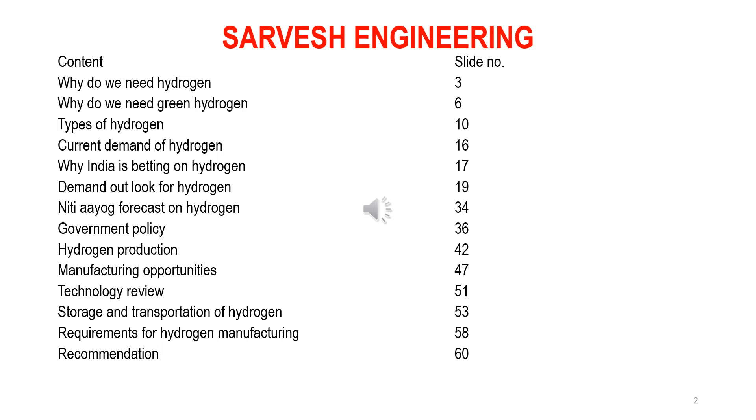As we all know, hydrogen is number one element in the periodic table. Although hydrogen is available in abundance, it is not available in free form. It is always combined with some other elements and it needs to be extracted for its use. Hydrogen requires very low amount of air or oxygen to burn. When hydrogen is burned, it produces water vapors, means there is no carbon or greenhouse gas generation during the process.

Hydrogen is not a direct substitute for coal, oil and natural gas, but it can help to decarbonize. Hydrogen could account for 12% of global energy by 2050. Decarbonizing the planet is one of the main objectives which world has taken over. The developed countries have agreed for decarbonization by 2050, whereas India has pledged for it by 2070.

Decarbonizing the production of hydrogen gives rise to green hydrogen. Means in green hydrogen there is no carbon element involved, either in manufacturing or in usage. Green hydrogen could be a huge value addition opportunity for India as it pivots towards renewables and from imported fossil fuels, which currently meet most of the oil and gas demand in India.

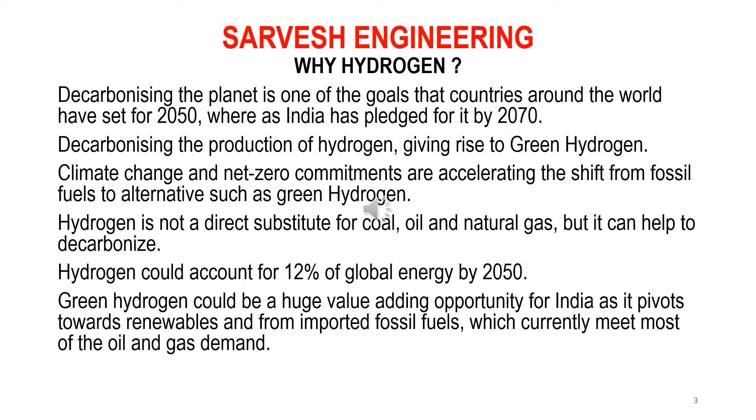The conventional process of making hydrogen uses fossil fuel. A novel green method of generating hydrogen could reduce global warming and greenhouse gas generation. Green hydrogen is produced by using renewable energy to split water into hydrogen and oxygen. Hydrogen is a key input material in fertilizer and refineries, so green hydrogen would help these industries cut aggregate emission.

Till now, we have been focusing on renewable energy sources for clean energy, but for industry and transport sector transition to net zero emission, a clean fuel is required, and that clean fuel is green hydrogen. When we use renewable energy for production of hydrogen, there is no carbon or greenhouse gas generation. When this hydrogen is used as a fuel, there is no carbon or greenhouse gas generation as it produces only water vapors, and it is the complete green fuel. This green fuel can help minimize the carbon generation and bring down the global warming to the desired level of 1.5 degree Celsius.

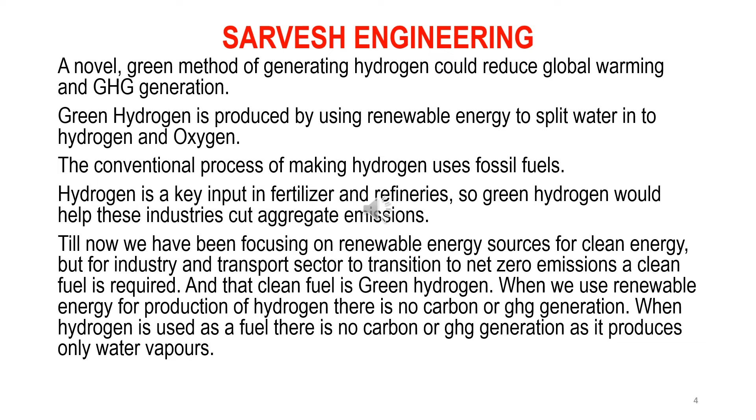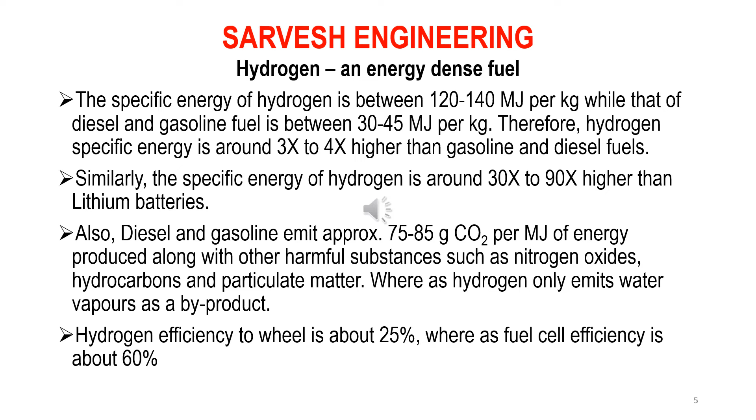When we burn petrol or diesel, gasoline emits about 75 to 85 grams of CO2 along with other harmful substances such as nitrogen oxide, hydrocarbons, and particulate matter, whereas hydrogen only emits water vapor as a byproduct. Hydrogen can be blended with natural gas, CNG, LPG, etc., or other fossil fuel in small portion. Hydrogen has the highest energy content by weight of any chemical fuel. It is 3 to 4 times higher than gasoline.

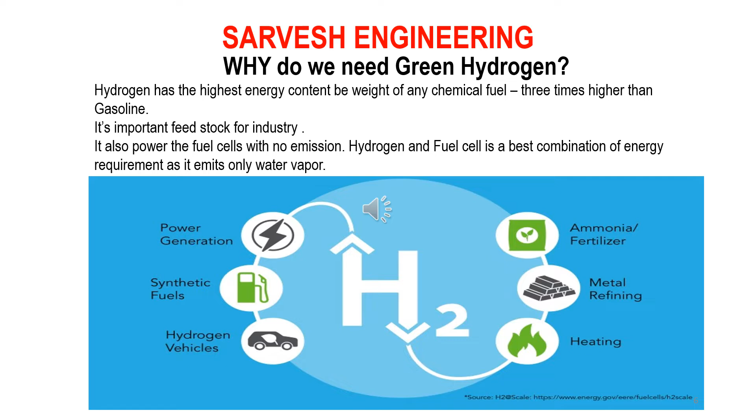Hydrogen is one of the important feedstocks for industry as it is widely used for fertilizer and refinery. Hydrogen also powers the fuel cell with no emission. Hydrogen and fuel cell is the best combination for energy requirement as it emits only water vapor. Hydrogen is one of the best energy carriers. Hydrogen is used for power generation. Hydrogen is used as synthetic fuel. Hydrogen is used for fuel in hydrogen vehicles. Hydrogen is used for heating. Hydrogen is used for metal refining, and hydrogen is used for manufacturing ammonia and fertilizer. This is a wide use of hydrogen in industry.

Why is the hydrogen economy important for India? One of the main reasons: we are importing energy worth $160 billion, and the import bills for energy can be minimized with hydrogen in place. We have also committed to decarbonization by using more and more renewable energy. Currently, we have installation of 92 gigawatt of renewable energy, whereas by 2030 we want to increase this generation to 450 gigawatt. This is possible with green hydrogen generation.

We are the third largest carbon emitter after US and China. We are emitting about 3.6 gigaton equivalent of CO2 in the atmosphere. And in order to become a clean energy leader, we need to minimize or zero down this carbon emission, and this is possible with green hydrogen.

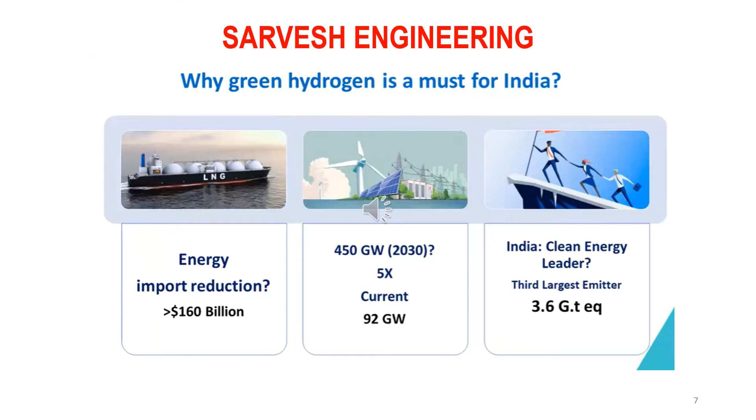The energy import bills of $160 billion, which are growing every year, consist of crude oil $112 billion, natural gas and LNG approximately $10 billion, coal $23.6 billion, petroleum products $16.2 billion, and ammonia about $775 million.

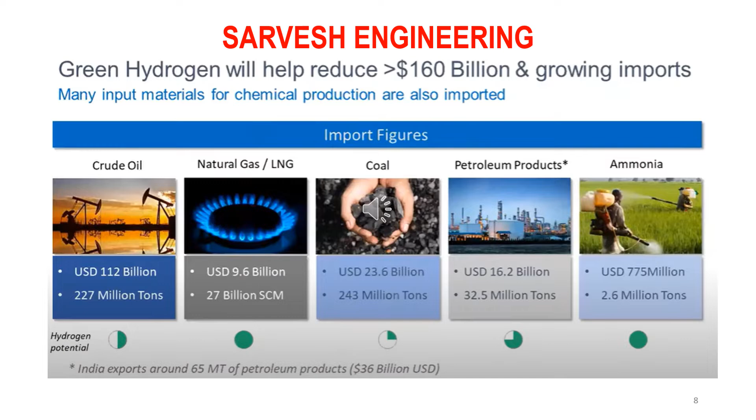This import bill can be minimized with green hydrogen if it is in place, and that's one of the main reasons why the government is focusing on green hydrogen and promoting green hydrogen manufacturing in India as per the recent government policies announced. Green hydrogen manufacturing is going to help us in two goals. One of them is energy security and the second is decarbonization.

Even if we do the complete decarbonization of our energy generation, that is, if we replace 100% of power generation by green energy, we are going to reduce only 18% of the carbon emission. The balance 82% of carbon emission is coming from other sources which need to be minimized. And for this decarbonization of 82%, we need to concentrate on green hydrogen usage in industry, the transport sector and other areas other than energy generation.

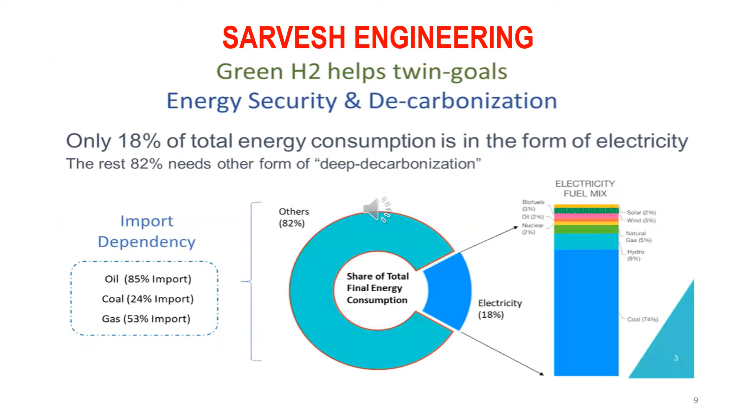Hydrogen is a colorless gas. Then why do we say green hydrogen, blue hydrogen, grey hydrogen? It is basically designated from the way it is manufactured. In grey hydrogen, we do steam methane reforming, and the energy used is non-renewable energy. So when we are manufacturing this, there is carbon emission into the atmosphere, and that's the reason it is called grey hydrogen. In blue hydrogen, steam methane reforming is done and the carbon generated is captured or stored. So this carbon is not released into the atmosphere, but there is carbon generation during the process, and that's the reason it is called blue hydrogen.

In turquoise hydrogen, methane undergoes pyrolysis and the carbon generated is stored. The energy is again non-renewable energy, so there is carbon generation during the process, and this is called turquoise hydrogen. Pink hydrogen is a type where water is electrolyzed with electricity received from nuclear power. In green hydrogen, water electrolysis is done again, but it is done with renewable energy and there is no carbon generation during the process. Since there is no carbon generation during the manufacturing of the hydrogen, it is called green hydrogen.

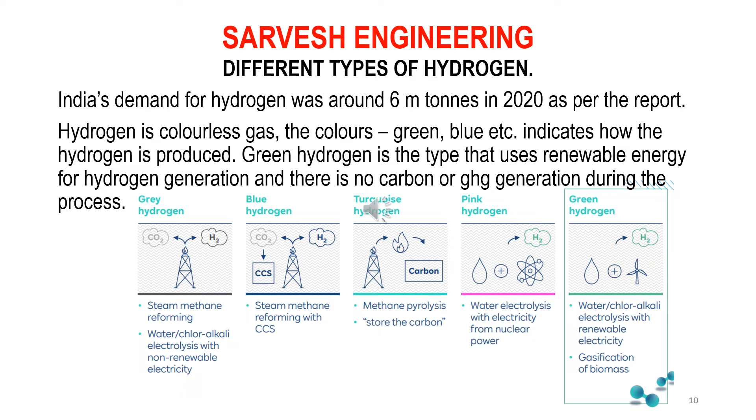And hereafter we will be talking more and more about green hydrogen because India aims to be a world leader in manufacturing and supply of green hydrogen. Green hydrogen is made by electrolysis of water, and the energy used for electrolysis is supplied by a renewable source. Since the water is split into hydrogen and oxygen, there is no carbon emission in the process and as such it is termed green hydrogen.

So in this green hydrogen process, we use energy from renewable sources. This energy is given to the electrolyzer. The electrolyzer does the electrolysis of the water. The hydrogen is distributed, stored and further used for end applications. During the end application, the exhaust is only water vapor and there is absolutely no carbon or greenhouse gas generation in the process, and that is the reason it is called green.

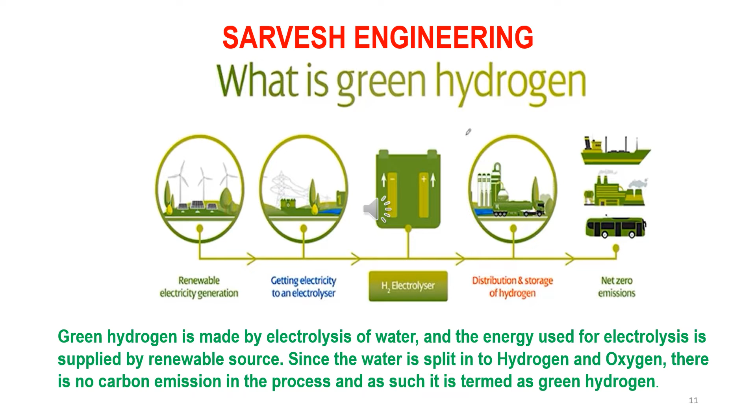This is a schematic of the electrolysis process. We have green energy as an input and water as an input. The green energy and water are supplied here to the electrolyzer. The electrolyzer converts this water into hydrogen and oxygen, and this is the basic process of electrolysis.

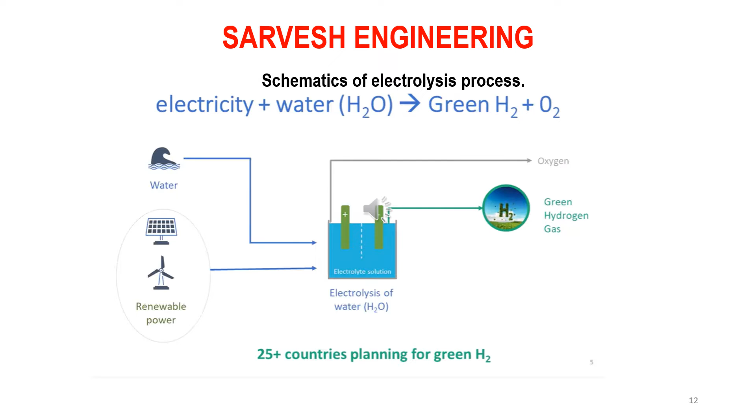India has the lowest solar energy price at 1.99 rupees per kilowatt-hour. And with this low energy price, India is targeting a green hydrogen price of $1.5 per kg by 2030. With this lowest price, the country is trying to be a global hydrogen supplier and take the lead.

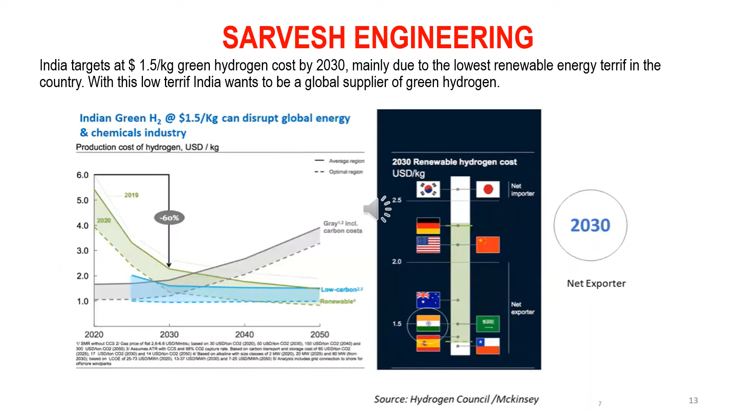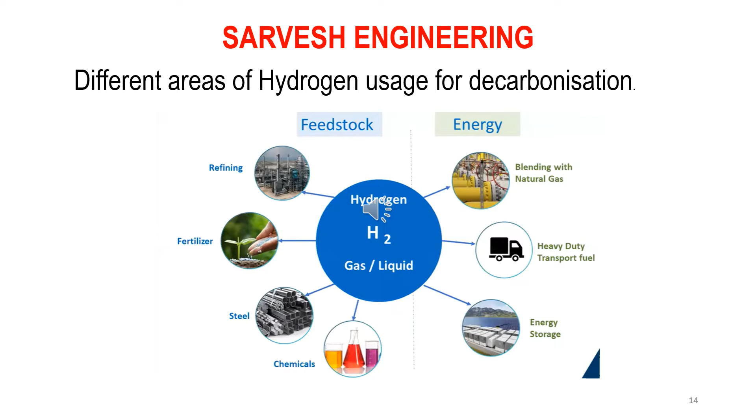Hydrogen can decarbonize different areas like energy by blending it with natural gas, heavy duty transport and fuel applications. Hydrogen can be used as energy storage also. Hydrogen is used as feedstock in chemicals, in steel manufacturing, for fertilizer and for refining. So hydrogen has a very wide application. Green hydrogen can reduce more than 30% of carbon emission in sectors other than energy. This 30% plus is contributed by chemicals, refining, cement, iron and steel industry, and heavy transport.

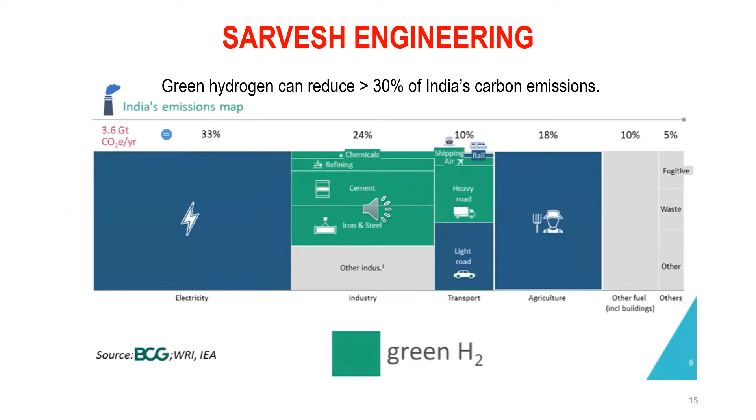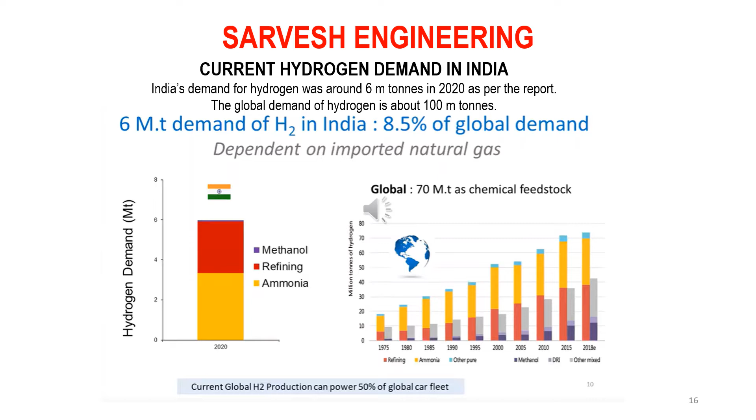Current hydrogen demand as of 2020 was 6 million tons, which is about 8.5% of the global demand. This 6 million tons is mainly used for refining and ammonia. The global demand for hydrogen was 70 million tons in 2020.

Why is India betting big on hydrogen? Mainly because of its energy security issues, emission targets, economic dependence and balance of trade, and energy subsidies. Fluctuation in oil and gas prices on a daily basis disturbs the supply and demand chain, which makes oil prices vary daily at fuel stations. We need to find an alternative to strengthen national energy security, and hydrogen is important for that.

India is the third largest global carbon dioxide emitter, accounting for about 7% of emissions. Our emission levels are below China and the United States of America. India has committed to reduce its emission level by 33 to 35% under the Paris Agreement by 2030, and by 2070 we have agreed to become a carbon neutral country.

India is the third largest crude oil importer, with import dependence of more than 80%. It also imports 53% of natural gas and 24% of coal requirements, which greatly affects our financial balance. India's oil import bill in 2019 and 2020 was approximately US dollar 111.9 billion and US dollar 101.4 billion respectively. India gives an overall energy subsidy of approximately US dollar 30 billion per year on oil, gas and coal transmission and distribution, renewable energy and electric vehicles.

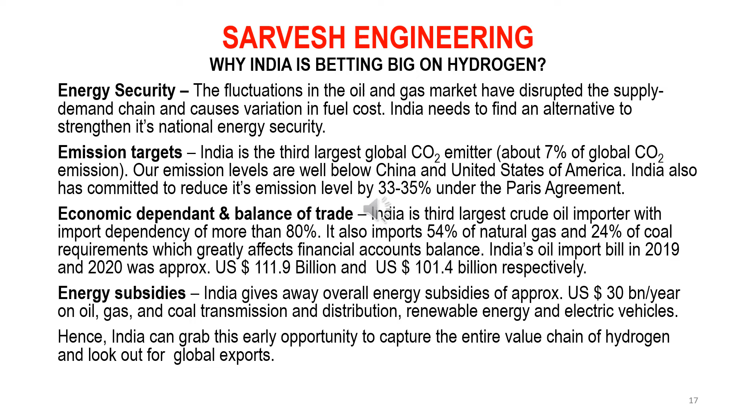Decarbonizing targets, complementary solution to renewable energy, supporting grid load management via storage solution, decarbonization of hard to abate sectors, technological advancement and falling technology costs are drivers for the green hydrogen movement in India.

To limit the global warming temperature rise to 1.5 degrees Celsius, a large number of renewable energy systems are required to be installed. Hydrogen can be a missing piece to complement renewable energy systems, storing excess energy produced during generation hours. A hydrogen-based energy system will also help improve load management. Hydrogen is a potential fuel and feedstock to reduce carbon intensities of sectors such as transportation, industrial and residential applications.

There has been significant improvement in the efficiency of electrolyzer and fuel cell technology in recent years. Because of these developments, the cost of hydrogen production is going down, and this price is supposed to go down at a very fast pace in the near future. This is one of the advantages for India, and these are the drivers for the green hydrogen movement in India.

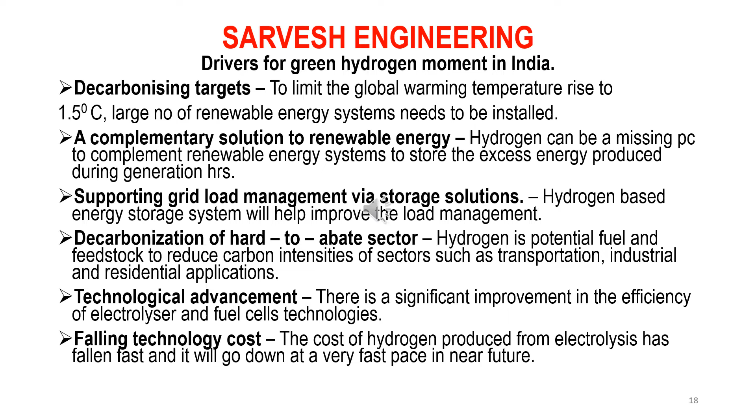The global hydrogen market is 100 million tons per annum, and more than 95% of this hydrogen is made from fossil fuels, primarily using natural gas through steam methane reforming.

Hydrogen demand in India can potentially grow more than four-fold between 2022 and 2050, amounting to around 29 million tons. Steel and heavy-duty trucking will be long-term drivers for demand, whereas industrial feedstock like ammonia and refining will see increased consumption, requiring 11 million tons of hydrogen by 2030 from the current level of 6 million tons. As per the Council of Energy, Environment and Water, green hydrogen demand could be up to 1 million tons in India by 2030.

Almost 16% of hydrogen demand in 2030 and 94% in 2050 can be met by green hydrogen. The cumulative value of the green hydrogen market in India is estimated at $8 billion by 2030 and $340 billion by 2050. Refining and ammonia are two sectors which will foster the demand, whereas steel and heavy-duty vehicles will be more prominent drivers for the green hydrogen economy.

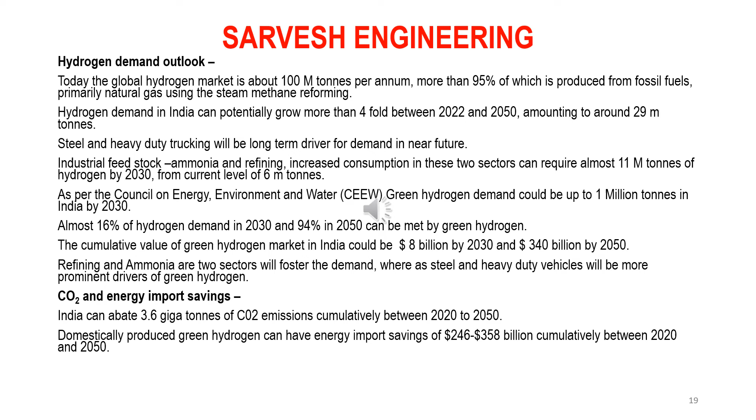With this, hydrogen has very high demand and India is going to be one of the leaders. In order to take the lead, IOCL has already started the first green hydrogen plant at the Mathura refinery. IOCL is also planning to set up several hydrogen production units on a pilot basis.

This includes a project at a refinery to produce high purity hydrogen of 99.9999% for the hydrogen fuel cell business. Currently, 50 buses in Delhi are being fueled by hydrogen-spiked compressed natural gas, which has an 18% hydrogen content.

Forecasts by various agencies see India's fuel demand climbing to 400 to 450 million tons by 2040, as against 250 million tons now. This gives enough opportunity for all forms of energy to coexist.

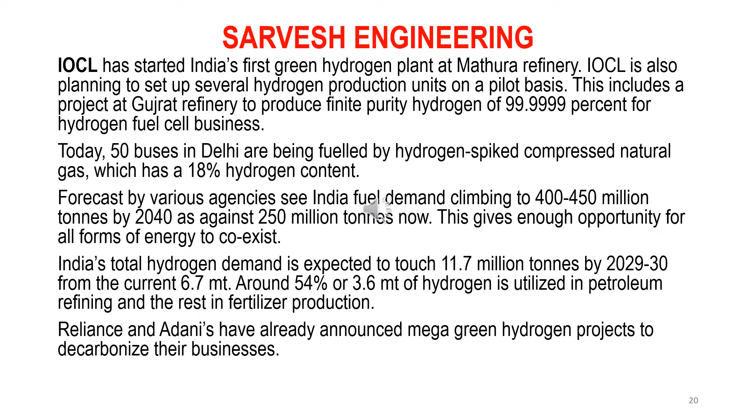India's total hydrogen demand is expected to touch 11.7 million tons by 2029 or 2030, from the current 6.7 million tons. Around 54% of hydrogen is utilized in petroleum refining and the rest in fertilizer production. Reliance and Adani have already announced mega green hydrogen projects to decarbonize their businesses. This is a schematic of hydrogen used for industrial applications.

We have renewable energy here. This renewable energy is given to the electrolyzer. The water is given as input to the electrolyzer. Hydrogen and oxygen come as output. The oxygen is released into the atmosphere or stored separately.

The hydrogen is given to the hydrogen storage tank, from where it goes to the fuel cell. The fuel cell produces energy, which is given for applications or the end user. The exhaust from the fuel cell, which is water vapor, goes into the atmosphere. The fuel cell also takes oxygen from the atmosphere to burn the hydrogen.

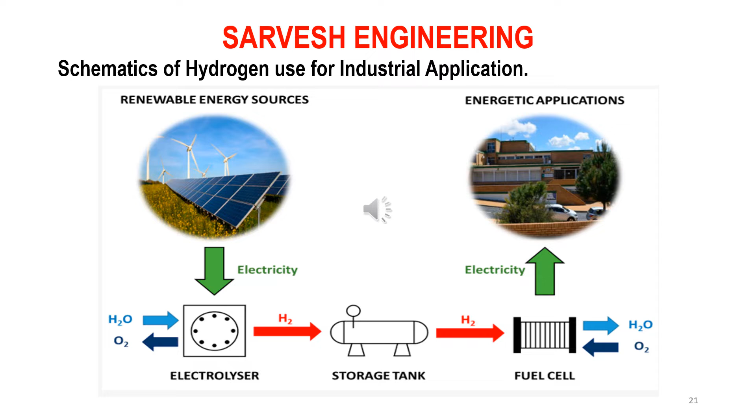In order to take advantage of the global scenario and demand in India, the government has a mandate to push green hydrogen generation by 2030. By 2030, the government is planning to generate hydrogen between $1 to 1.5 per kg.

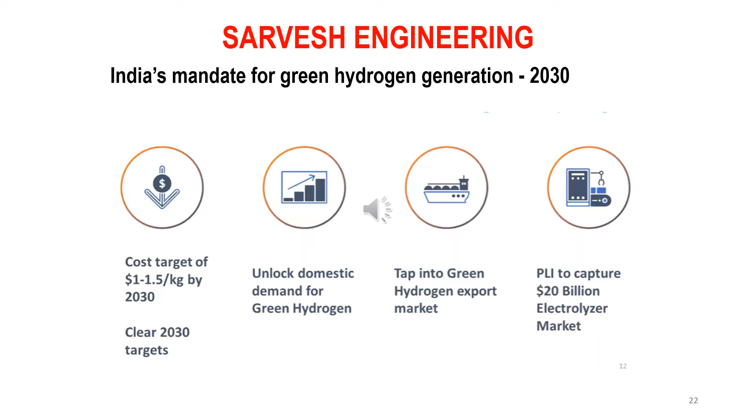In order to push the demand, the unlocking of the domestic market is also planned. The government is also tapping into the green hydrogen export market in a big way, and to encourage the manufacturing of green hydrogen, a PLI scheme is already declared to capture a $20 billion worth electrolyzer market by 2030.

In order to achieve the ambitious targets of green hydrogen in India, we need to focus on the industry, the fertilizer sector, the gas economy, the transportation, and the power sector.

The industry will include refineries, steel manufacturing, chemicals like caustic soda and methanol, industrial heat application, and food and beverages. In the fertilizer sector, urea production, DAP production, ammonium nitrate production, and ammonium phosphate production.

In the gas economy, we have to blend hydrogen with natural gas and give it in a grid supply. The compressed gas distribution network also needs to be used for this purpose.

In the transport sector, fuel cell electric vehicles, heavy duty and commercial vehicles, trains, aviation and shipping need to be on hydrogen.

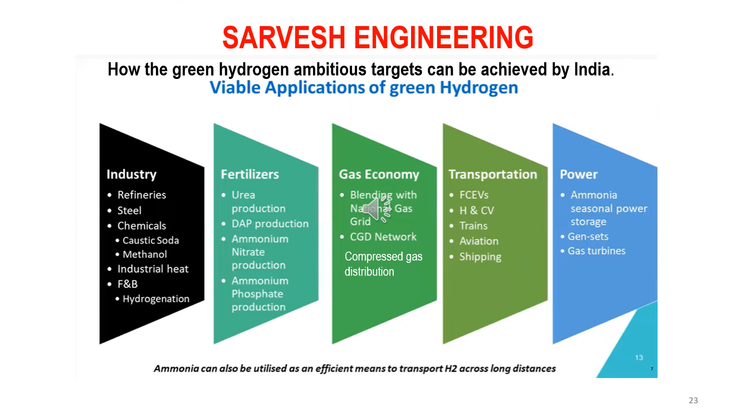There are 5 market segments where green hydrogen can be used immediately in India: displacement of existing grey hydrogen; feedstock for other high value products like ammonia, methanol and other chemical manufacturing; and decarbonization of some current industrial processes like steel manufacturing, refineries, cement industry, etc.

Blending in the existing natural gas system - blending at 5-10% by volume is possible with minimal modification to existing gas infrastructure - and long-term energy shifting in grid-connected renewable energy systems.

Geographies such as Europe and Asia Pacific, like India, Japan and China, are expected to be major consumers of green hydrogen. There is a very high chance of exporting green hydrogen to Japan, Europe and the United States of America.

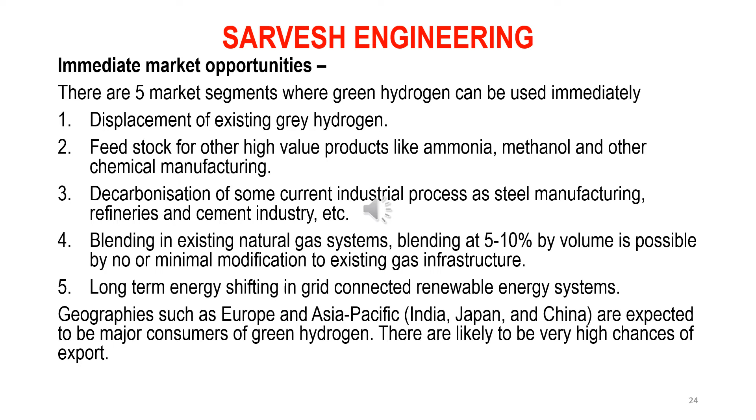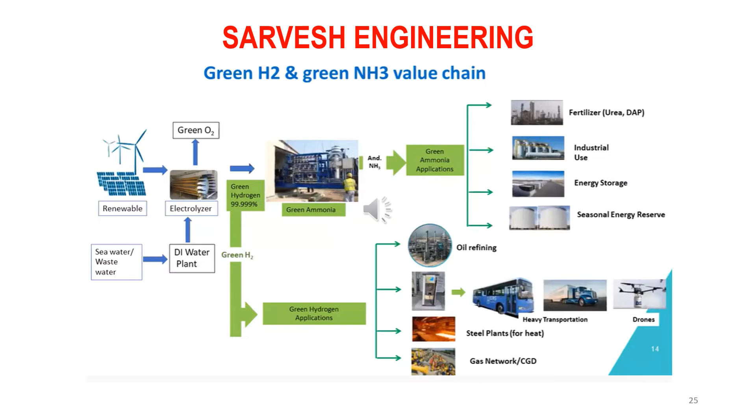Whereas the second application of green hydrogen is for oil refining, heavy duty transportation, steel plants and gas networks.

Driven by low-cost renewable energy, the country can emerge as one of the most competitive sources for green hydrogen in the world. Disparity in sources and consumption of green hydrogen is bound to create a market for green hydrogen as a tradable energy commodity in the long run.

Energy importers like Japan and South Korea are willing to pay premium prices and are exploring the possibility of importing hydrogen through ocean shipping. European countries are also welcoming prospects from both intra-region and international hydrogen trade.

Traditionally, energy exporting regions like Australia and the Middle East are increasingly positioning themselves for hydrogen export. Japan and Australia are currently working on a hydrogen energy supply chain project.

Green hydrogen from India can be competitive at a marginal level for select geographies in 2030, and it will be remarkably competitive by 2050 compared to countries like Australia and the United States. The requirement of green ammonia and green steel in the long run will also act as a big driver for the export market of green hydrogen from India.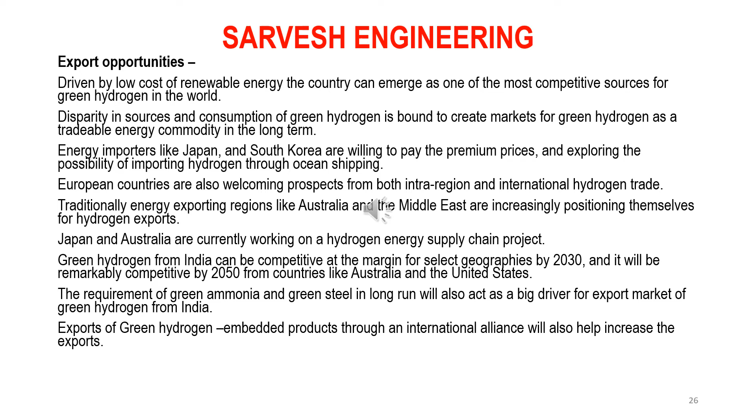Export of green hydrogen embedded products through an international alliance will also help increase the export, and this indicates that there are very high opportunities for export of green hydrogen to the world.

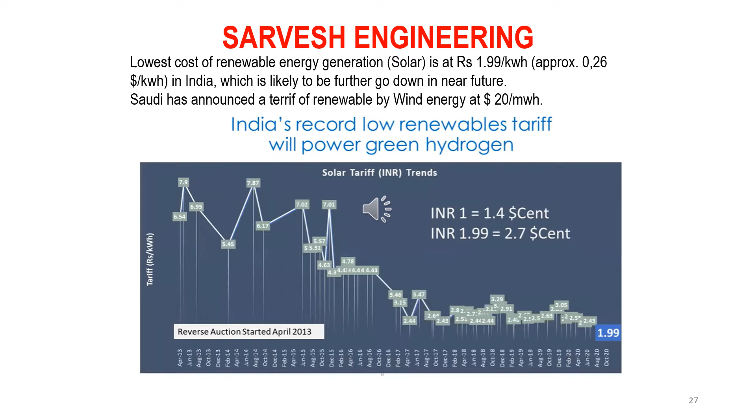Current tariff of solar power generation at 1.99 rupees per kilowatt hour, approximately 26 cents per kilowatt hour, is there in India, and this power rate is likely to go down further in the near future. Saudi Arabia has also announced a tariff of renewable power by wind energy at $20 per megawatt hour, and this low tariff of power generation will definitely help minimize the cost of green hydrogen generation, and in the long run it will help India to manufacture green hydrogen at an attractive price of between 1 and 1.5 US dollars.

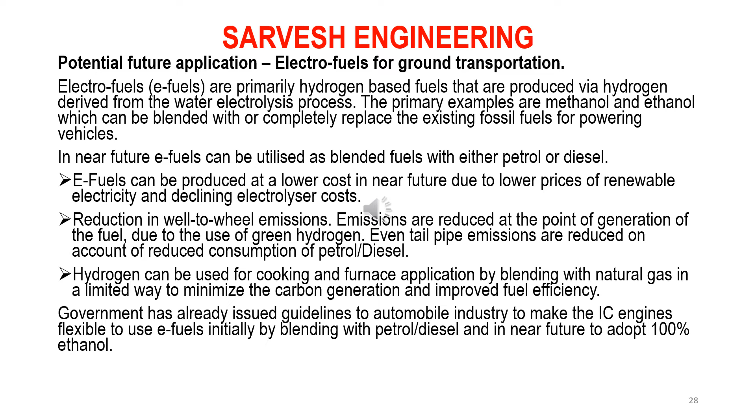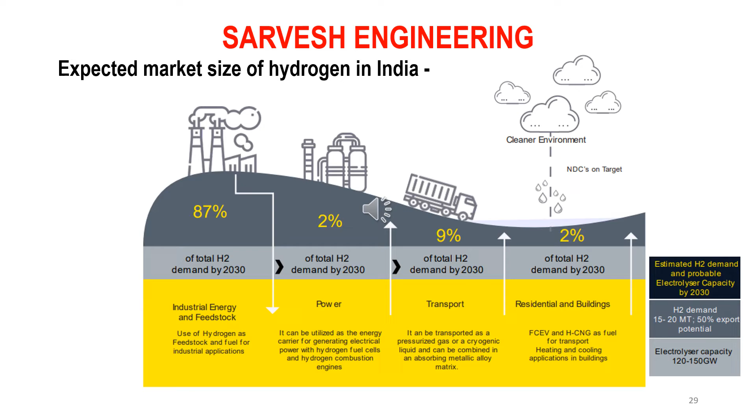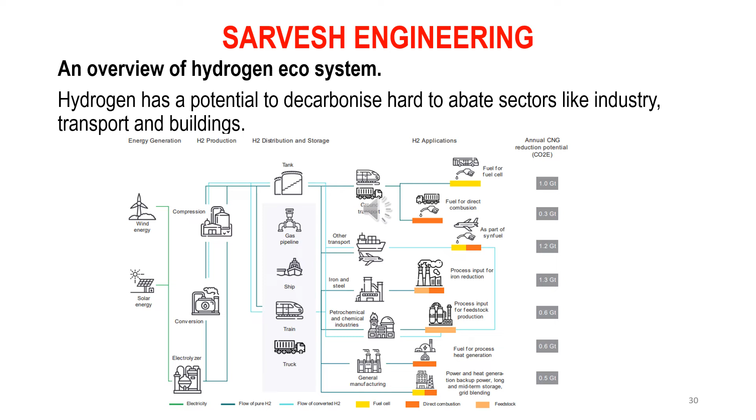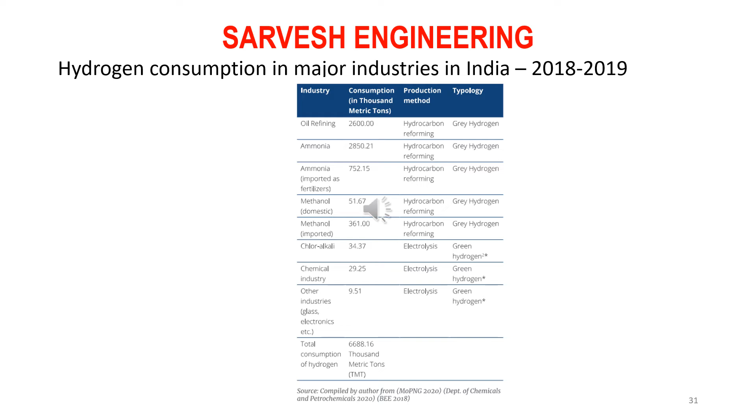This consumption of hydrogen is from 2 years ago, which has increased in the last 2 years, and in the next 2 years it is going to increase again. The requirement is going up day by day, and we will have very high hydrogen demand. With the government mandate, grey hydrogen and blue hydrogen will be replaced with green hydrogen. So green hydrogen will definitely have very high demand by 2024 or 2030.

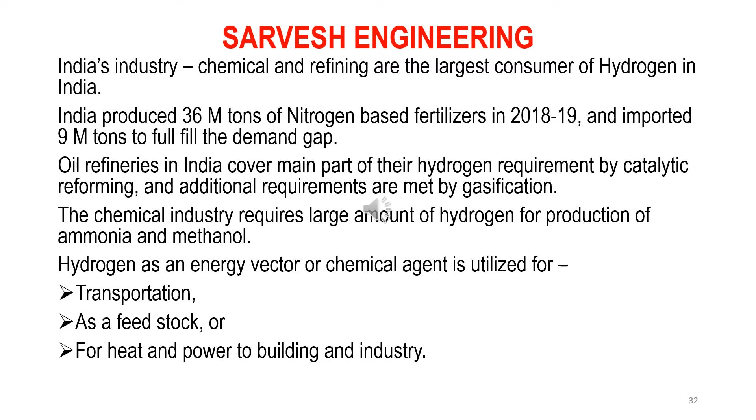The demand for Indian industry in the chemical and refining sector of hydrogen is very high. Oil refineries cover the main part of their hydrogen requirement by catalytic reforming, with additional requirements met by gasification. The chemical industry also requires large amounts of hydrogen for production of ammonia and methanol. Hydrogen as an energy vector or chemical agent is also utilized for transportation, as a feedstock, or for heat and power, to buildings and industry. This indicates the demand for hydrogen is going to be very high, and specifically the demand for green hydrogen is going to be very high in the near future.

In the financial year 2018-19, India produced and consumed 5.6 million tons of hydrogen. The transport sector, which accounts for 90% movement of passengers and 59% of freight, generates 88.4% of carbon dioxide emission. India spent $112 billion for import of crude oil.

As per the Green Initiative for Future Transport, India is targeting by 2030: 1 million hydrogen-powered vehicles on the road, 750,000 hydrogen-powered two and three-wheelers on the road, and 100,000 buses on the road.

Hydrogen demand for methanol will increase by 12% CAGR between 2020 and 2050. By 2050, 60% of the hydrogen demand for methanol will be met via green hydrogen. This again indicates that there is going to be very high demand for green hydrogen in the near future.

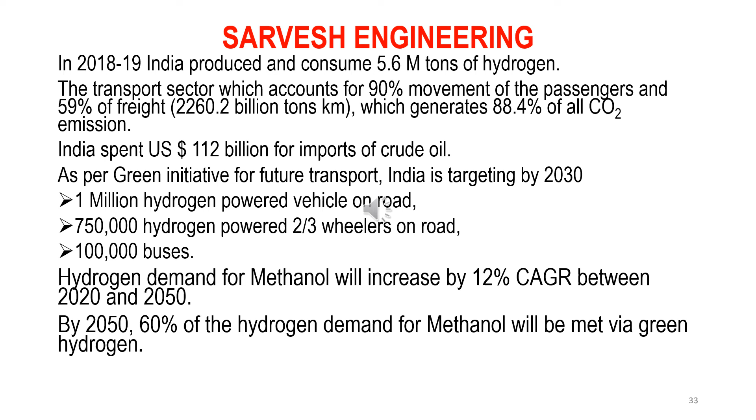Niti Aayog has suggested a target of 160 gigawatt of green hydrogen production capacity, out of which 100 gigawatt will be reserved for export.

The potential mandate for existing applications is also given by Niti Aayog, where the refinery sector will have a target to convert 50% of its consumption by 2030, and the cutoff date for 100% green hydrogen utilization will be 2035. The fertilizer sector will have a target to curb import substitution by 100% by 2030, and cut off by 2040.

The green hydrogen demand targets will address a demand of 20 gigawatt electrolyzer capacity by 2030 for local consumption, and the initiative-based demand will be about 45 gigawatt. The export demand is considered at 95 gigawatt, making a total of 160 gigawatt of electrolyzer capacity.

And this capacity of electrolyzer to manufacture will open a very big door for local manufacturing also.

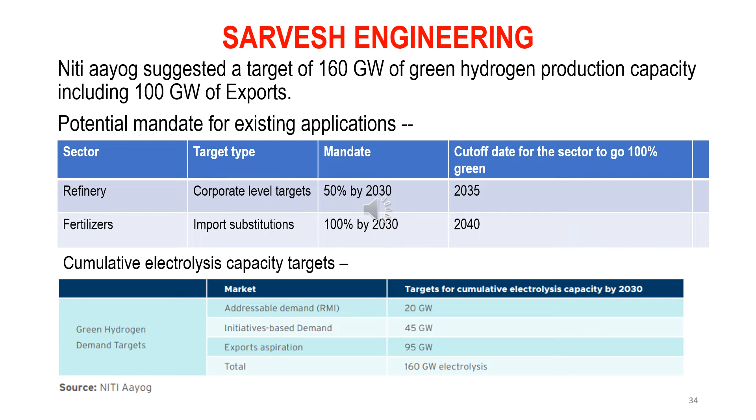The cost of green hydrogen depends primarily on the levelized cost of electricity, capital expenditure required, and the utilization factor. Achieving $2 per kg cost of hydrogen production from electrolysis requires an electricity input cost much less than 0.02 per kilowatt hour at existing capex level.

With the current rupees 1.99 per kWh solar power tariff in India and the new solar parks, the cost of solar power generation is expected to further go down. This will definitely bring down the cost of green hydrogen manufacturing. With low solar power generation cost, green hydrogen production sub $2 is very well possible in India in the near future.

Purely based on cost competitiveness, green hydrogen is expected to dominate the market in the long run. The hydrogen price, with electricity at 1.99 per kilowatt hour and further likely to go down, achieving a target of less than $2 by 2030 is definitely possible.

According to my individual perspective, the cost of green hydrogen generation in India will be drastically low compared to other European countries, mainly due to the low cost of energy and the low labor price. Cost of energy is about 50% of the total cost of hydrogen, and at the current solar price of rupees 1.99 per kWh, it requires about rupees 10 energy cost for 1 kg of hydrogen generation. So achieving the lowest cost of production and becoming a global supplier of hydrogen generation is very well possible, and the government is focusing and targeting the same thing.

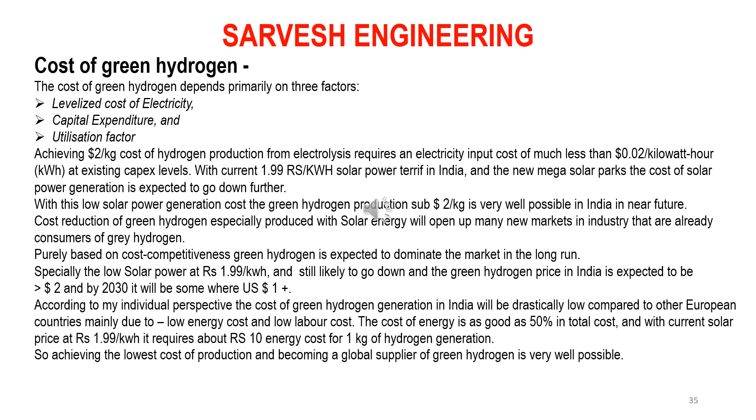In order to achieve the targets, the government is encouraging and giving full support for manufacturing green hydrogen and the equipment required for it. The government has announced a national green hydrogen policy with a target of manufacturing 5 million tons per annum by 2030, and is also supporting development of green hydrogen generation and ancillary requirements like renewable power and electrolyzers.

For renewable energy generation for green hydrogen, the government shall provide land in designated solar parks. The energy transportation for 25 years is free, subject to installation by the deadline of June 2025. Producers will be allowed to set up bunkers near the ports for storage of green hydrogen and green ammonia.

For exports by shipping, the manufacturers of green hydrogen are allowed to purchase renewable power from the power exchange, or set up renewable energy capacity themselves or through any other developer anywhere in the country. The manufacturer can bank any surplus renewable energy generated with discoms for 30 days and use it as and when required.

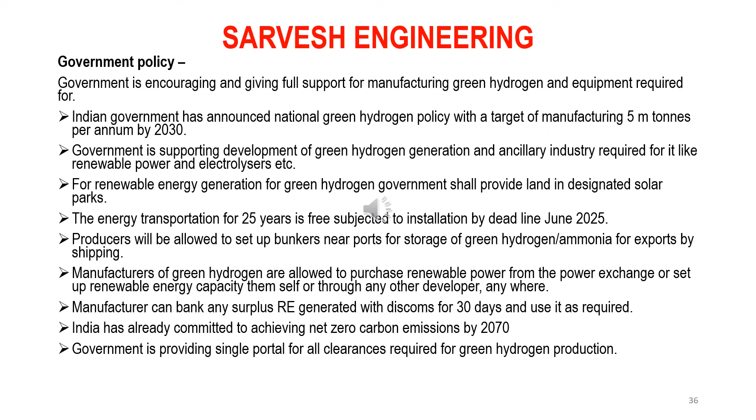India has already committed to achieve net zero carbon emission by 2070. Government is also providing a single portal for all clearances required for green hydrogen production. This is the way the government policies are in favor of business, and government is giving support to manufacture green hydrogen and the equipment required in the country.

Government has taken a lot of initiatives to boost green hydrogen production and consumption. In order to build a hydrogen based economy, government has already created a demand mandate based approach. The right policies for market creation are already there, and a progressive and stable regulatory framework is also done.

For unlocking the demand, phase-wise scale-up of the system is done. In the near future, refinery, ammonia, and city gas distribution blending will be the first priority. In the next stage, green steel and industrial heat applications will be there, followed by heavy duty vehicles and storage. In the last stage, all energy applications will move to green hydrogen.

Stable regulatory framework, policy leadership, and local manufacturing of electrolyzer, green hydrogen, and green refining are going to be the key pillars for success in green hydrogen. Government is pushing green hydrogen demand basically by setting up targets, demand creation and mandates, and a vibrant export market.

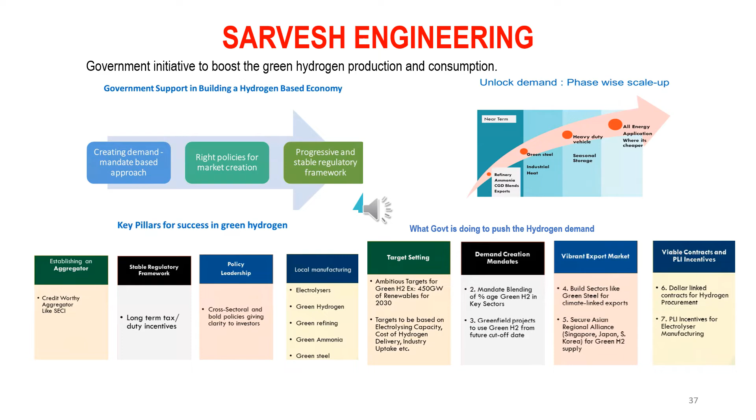So government is also trying their level best to promote green hydrogen manufacturing in India. In order to achieve the targets for green hydrogen consumption, government has targeted different sectors phase-wise.

In the first phase, the focus will be on rapid gigawatt scale sectors like refining and fertilizer. In mid-term, testing for new applications like city gas distribution, steel, etc. Whereas long-term focus will be on unlocking sectors like power and heavy-duty trucks.

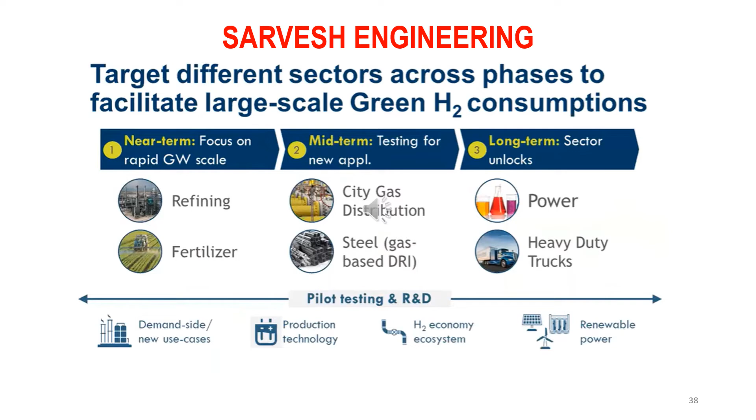In the short-term focus, the refining sector will be targeted with 100% green hydrogen in new urea and refining capacity, a blending mandate for old plants in urea and refining, and green ammonia for export.

For ammonia, the electrolyzer scale and new capacity by 2030 will be up to 14 gigawatts. Blending of existing stocks will be up to 10 gigawatts, and the overall capacity by 2030 will be between 15 to 19 gigawatts. This is definitely a very high capacity, and achieving this capacity is not easy.

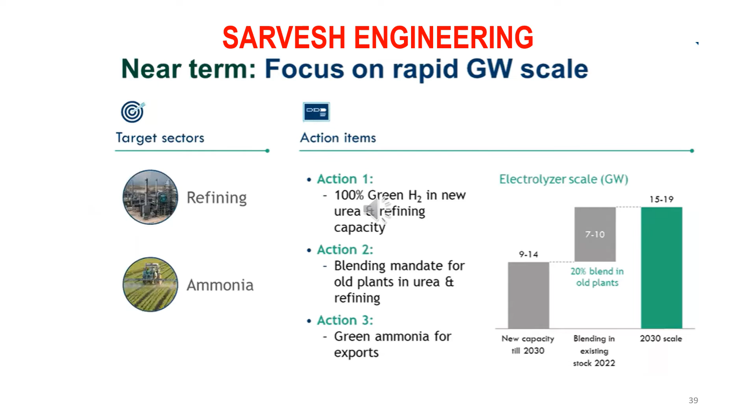The medium term targets are for testing new applications. The target sectors are gas blending and steel. In gas blending, this involves investing in R&D and pilot projects for impact testing and hydrogen blend limits to the existing infrastructure, ecosystem and business model development, and designing of equipment for higher blends.

The designing of equipment is required because hydrogen mainly requires very high pressures, and the existing gas network is not suitable for that pressure. So it needs to be...

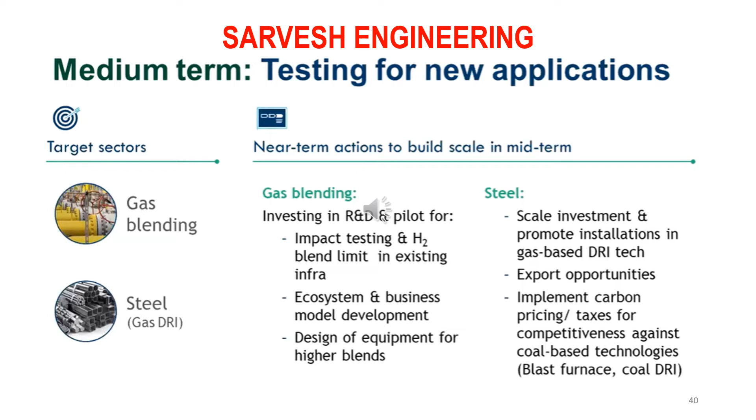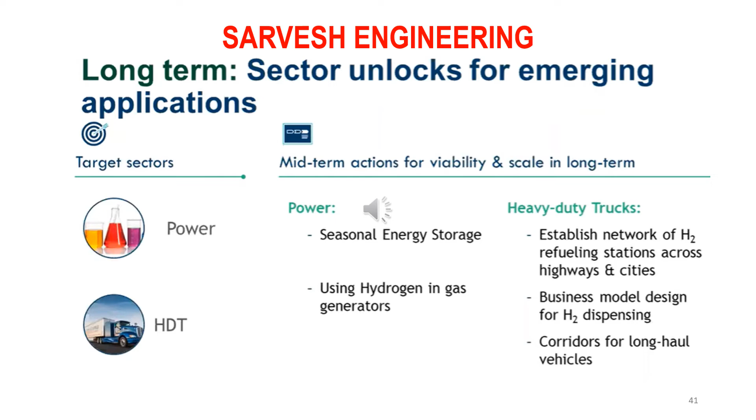The long-term targets are for unlocking sectors for emerging applications like power and heavy-duty transport. In power, seasonal energy storage and using hydrogen in gas generators is going to be the main focus area, whereas establishing a network for hydrogen refueling stations across highways and cities, business model design for hydrogen dispensing, and corridors for long-haul vehicles is going to be a focus area for heavy-duty trucks.

Hydrogen can be produced using different technologies, but sustainable production technologies will create future possibilities of adoption and scale-up. Currently, hydrogen is produced mainly from fossil fuels such as coal and natural gas. However, it can be generated from various feedstocks also. The most common methods for hydrogen generation are thermal process, electrolytic process, solar driven process, and biological process.

In thermal process, a typical high temperature process where steam reacts with hydrocarbon fuels to produce hydrogen. Almost 95% of all hydrogen is produced from steam reforming of natural gases. In electrolytic process, water is separated into hydrogen and oxygen through a process called electrolysis. The equipment for converting water into hydrogen and oxygen with electrolysis is called an electrolyzer.

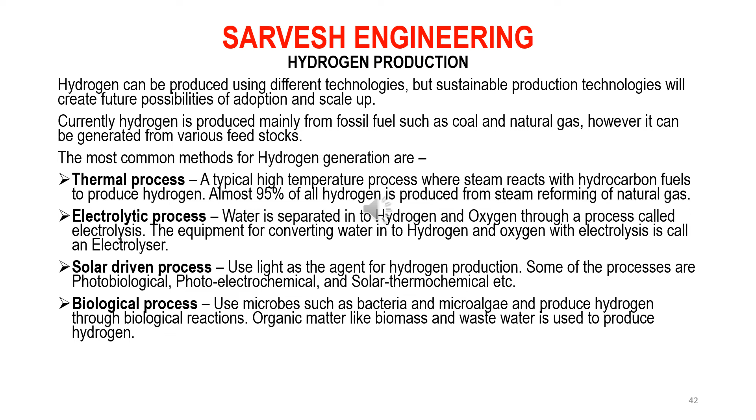In solar-driven process, light is used as an agent for hydrogen production. Some of the processes are photobiological, photoelectrochemical, and solar thermochemical, etc. In biological process, microbes such as bacteria and microalgae produce hydrogen through biological reaction. Organic matter like biomass and wastewater is used to produce hydrogen in the system.

Producing green hydrogen by electrolysis from renewable sources involves breaking down of water molecules into oxygen and hydrogen. In the process, water used in the electrolysis must contain salt and minerals to conduct the electricity. Two electrodes are immersed in water and connected to a power source, and a direct current is applied to it. The dissociation of hydrogen and oxygen occurs when the electrode attracts ions with an opposite charge to them. During the electrolysis, an oxidation reduction reaction occurs due to effect of the electricity.

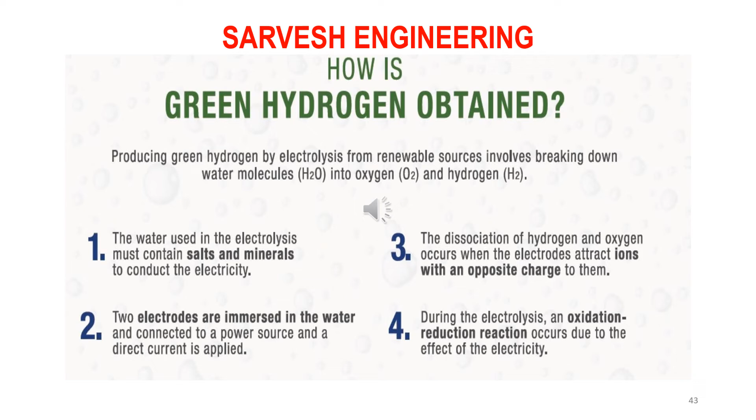Electrolysis is a popular process to generate hydrogen. In electrolysis process, electricity splits water molecules into hydrogen and oxygen. An electrolyzer contains two electrodes, an anode and a cathode, separated by a membrane and surrounded by the water. Water is put into the system. This water reacts at the anode to form oxygen gas and positively charged hydrogen ions. Hydrogen ions move across a membrane while electrons flow through the external circuit. Hydrogen ions and electrons meet up at the cathode and combine to form the hydrogen gas with the help of catalyst. So this is a basic process of electrolyzer.

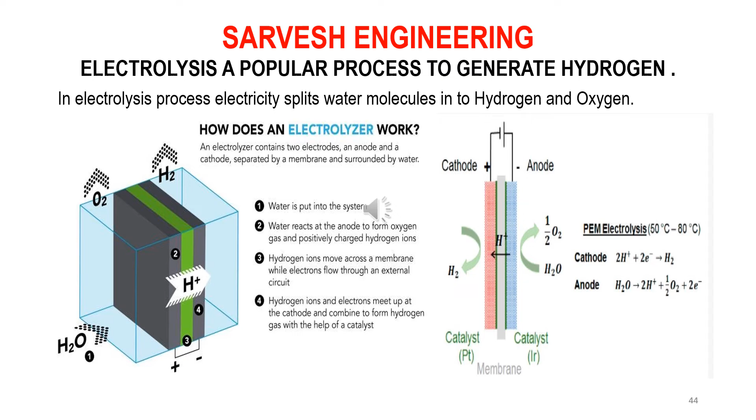Water electrolysis can be done with different technologies like alkaline electrolysis, proton exchange membrane electrolysis, anion exchange membrane electrolysis, and solid oxide electrolysis. In alkaline electrolysis process, potassium hydroxide in water is used, whereas in proton exchange membrane, the electrolyte is the proton exchange membrane itself. In anion exchange membrane, the anion itself is the electrolyte, and in solid oxide, ceramic membranes are used.

Alkaline, proton exchange, and anion, all these three technologies are working below 100 degrees centigrade, whereas solid oxide process is working at 800 degrees centigrade. And the solid oxide process generates hydrogen at atmospheric pressure, while the other three generate hydrogen at higher pressure like 30 bar and above.

The alkaline electrolysis process is medium flexible while having high efficiency, high maturity, and high market availability. Proton exchange membrane system is highly flexible but having medium high efficiency. The maturity is also medium and market availability is more than 100 megawatt capacity. Whereas anion exchange membrane has a very high flexibility but medium efficiency, low maturity, and it is available only under 1 megawatt capacity.

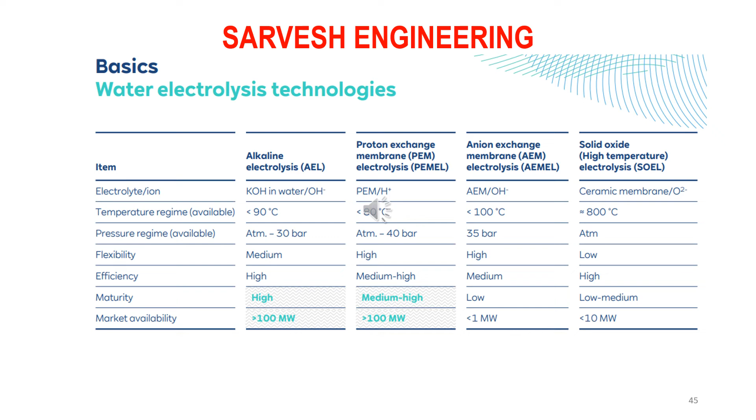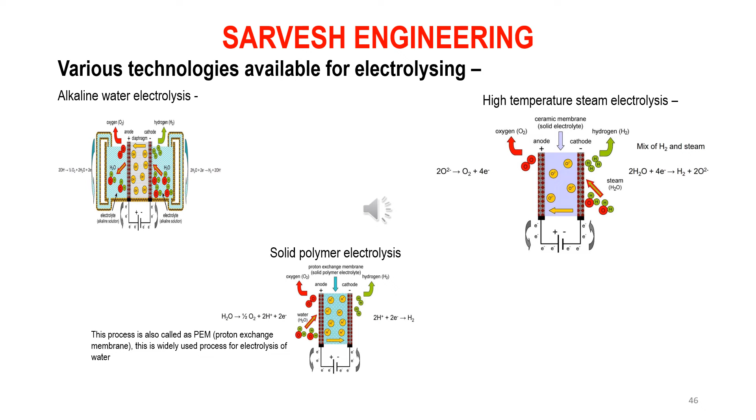The solid oxide membrane has low flexibility, high efficiency, low to medium maturity, and is available for less than 10 megawatt capacity, and this capacity is not ideally suited for commercial applications. In this slide, we have shown how the different water electrolysis technologies are working and how the oxygen and hydrogen is separated in the process. This is only a graphic representation or schematics, so we'll skip this and go ahead.

After understanding the hydrogen market demand and the requirements in India, we understand that there is a very high requirement of hydrogen and the demand is going to go up daily. Now, for manufacturing this hydrogen, there are different opportunities like manufacturing electrolyzers, manufacturing fuel cells, scaling up the production, manufacturing hydrogen cylinders, manufacturing storage systems for stagnant storage, manufacturing distribution systems, and manufacturing dispensing systems.

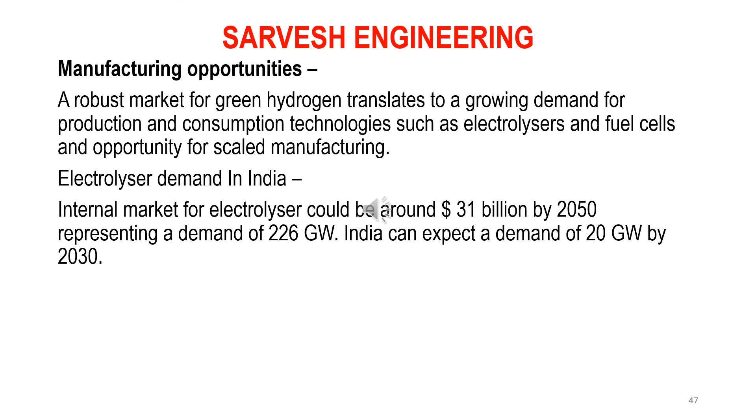The electrolyzer demand in India is likely to be around 31 billion by year 2050, while a demand of 226 gigawatt is expected. India can expect a demand of 20 gigawatt by 2030. Manufacturing opportunities for electrolyzers are very high, and between 9 to 12 billion dollars of electrolyzers are required in India by 2030 with a potential of 20 to 25 billion.

The current capacity of electrolyzers is 10 gigawatt, whereas the global requirement is likely to be 100 gigawatt. Out of this 100 gigawatt, 40 gigawatt will be for European market, 25 gigawatt will be for Chile market, and 5 gigawatt is for UK market. So there is a gap of about 30 gigawatt, and this is the target for India to achieve, to make electrolyzers by 2030.

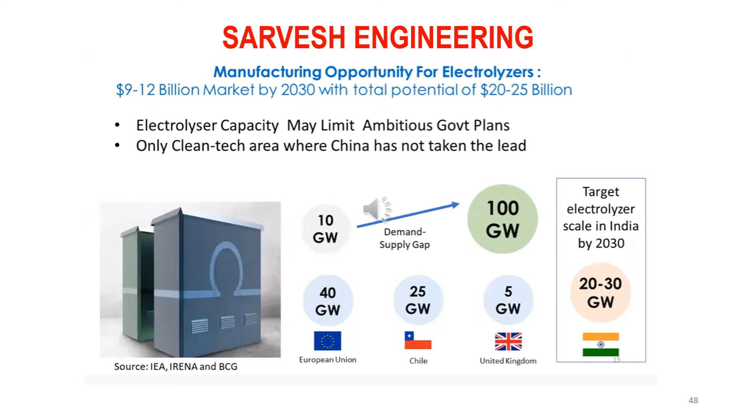We have seen that there is very high demand of green hydrogen as well as electrolyzers for the green hydrogen. In order to achieve the targets and to fulfill the demand, government has already issued a roadmap for hydrogen business. As per the government roadmap, between 2020 and 2025, green ammonia will be available for exports. Part of the refineries will be switching over to green hydrogen. Ammonia for fertilizer will be from green hydrogen, and part of the city gas distribution will be blended with hydrogen.

Between 2025 and 2030, the green steel for export will be made out of green hydrogen. By 2030, domestic green steel will be converted to green hydrogen. Between 2025 and 2030, heavy duty trucking will be converted to green hydrogen, and by 2040 and 2050, seasonal storage and other energy applications like ships and aeroplanes etc. will be converted to green hydrogen.

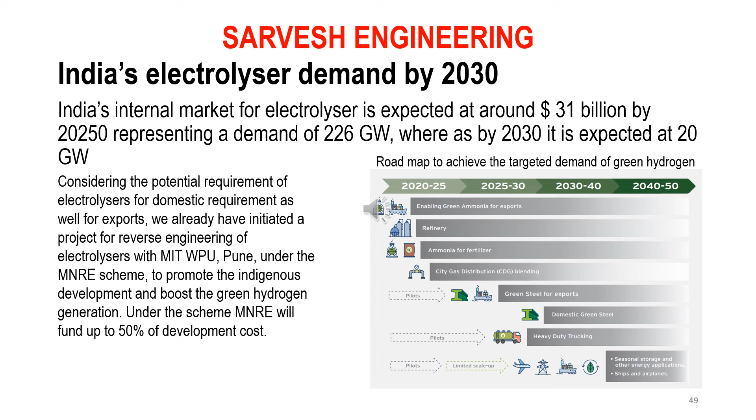The senior professor who is a doctorate in the petroleum subject will be also available for us. There is a possibility that we can hire the postgraduate students, those who are appearing for the PhD, for this project, for which we may have to pay the salaries to them. And once the project is approved by government, the government will pay those students. We will have to pay some charges to the institution for incubation facility and other support they will provide. The charges can be negotiated to find out exactly what we need to pay at the appropriate time.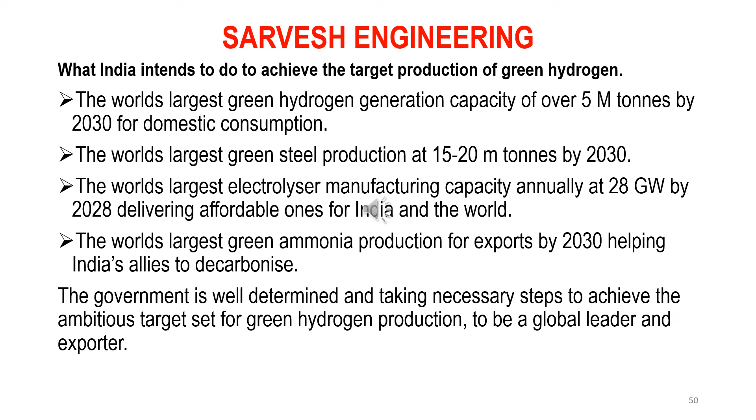The world's largest electrolyzer manufacturing capacity annually at 28 gigawatt will be operative by 2028, delivering affordable electrolyzers to the local market as well as for exports. The world's largest green ammonia production for exports will be available by 2030 and it will help other countries to decarbonize. The government is well determined and taking necessary steps to achieve the ambitious targets set for green hydrogen production to be a global leader and exporter.

Currently, the electrolyzer market is dominated mainly by alkaline and proton exchange membrane technology. Advanced technologies like solid oxide, anion exchange membrane, and ETAC are nearing commercial deployment by 2024. The stack, power supply, and water circulation system account for more than 80% of the cost of the PEM and alkaline electrolyzers. Power supply alone accounts for about 20 to 30% of the total system cost, and the energy cost is almost 50%.

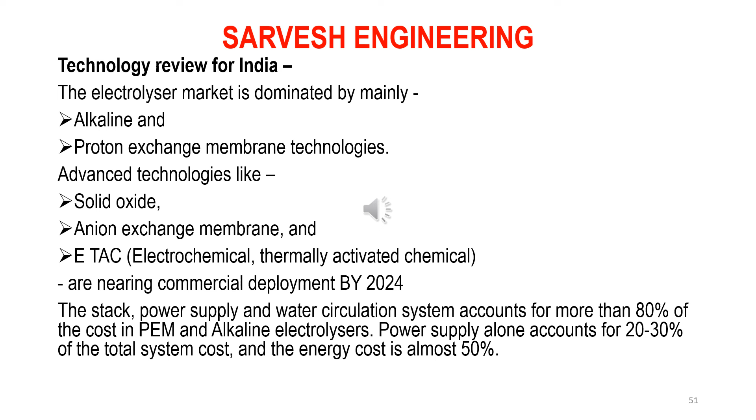Considering all these technologies, one will have a question: which technology should we go for in the pilot and small commercial project? So we can go for the proton exchange membrane technology, which is a well matured technology, and the European prospective partner we have contacted has deployed more than 15 systems in the European market. The company is experienced in hydrogen manufacturing, storage, transportation, dispensing, and applications in various areas like transportation, marine, etc. It means the prospective partner can give us a complete end-to-end solution for hydrogen technology.

The company has its own patented design of storage tanks, which are based on carbon composite and are one of the lightest tanks available for hydrogen storage. As an option, we have another technology which is termed ETAC technology, or electrochemical, thermally activated chemical technology, which is developed by a startup in Israel, and this technology will be available for commercial application by 2024.

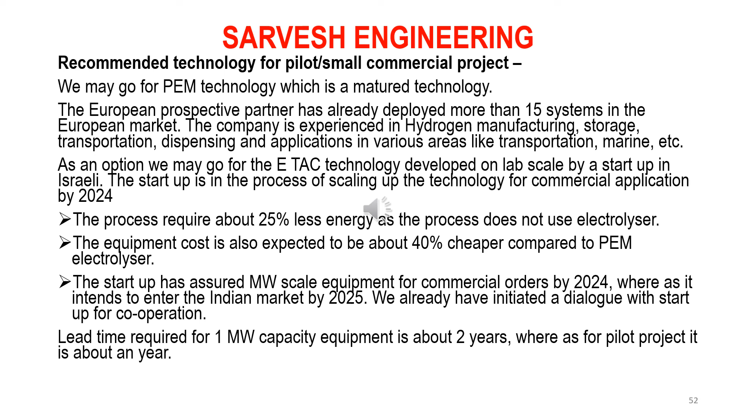After manufacturing hydrogen, its storage and distribution is also one of the very important areas. The storage of hydrogen has been difficult, basically due to its very low density, very high flammability, and ease of dispersion. Under normal temperature and pressure, 1 kg of hydrogen occupies a volume of 12.15 cubic meters and has an energy of 33.5 kilowatt hours.

Hydrogen can be stored by three different techniques. First one is a storage of hydrogen in gas form. For storing the hydrogen in a gas form, hydrogen is compressed to 700 bar, and when it is compressed to 700 bar, 1 meter cube of hydrogen will weigh approximately 40 kg.

Hydrogen can be stored in liquid form or cryogenic form also. Hydrogen boils at a temperature of minus 253 degree centigrade. So the liquid storage has to be below this temperature. Maintaining this temperature is difficult and it is costly because it requires a lot of energy. The liquid hydrogen weighs approximately 70 kg for 1 meter cube of the volume.

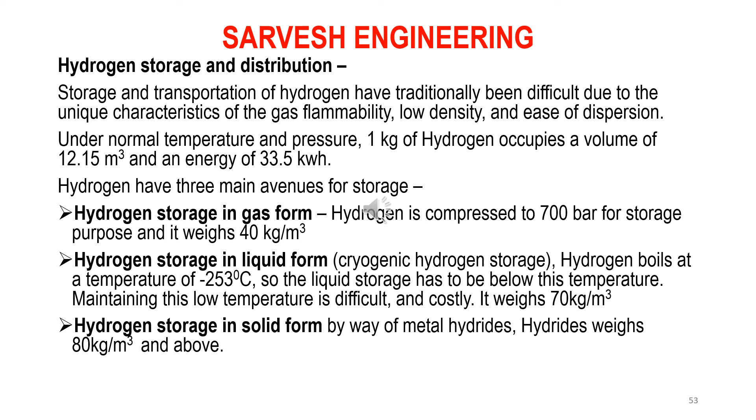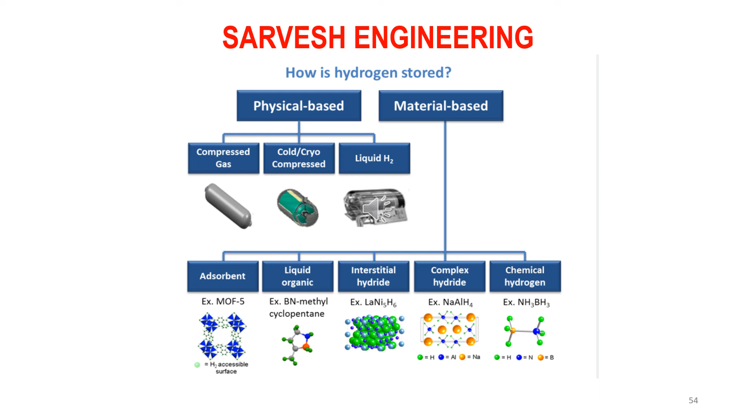Hydrogen can be stored in a solid form also by way of metal hydrides, and the metal hydrides weigh 80 kg per meter cube and above. This slide shows how the hydrogen is stored in compressed or in liquid or in cryogenic form or in metal hydrides.

After storage, the important area which needs to be considered is the transportation of hydrogen, because hydrogen needs to be transported to the end application area. This hydrogen can be transported to different places either with the pipelines or using trucks, trailers and ships or using the tanks.

Hydrogen can be transported using existing natural gas pipeline or the new pipelines. Hydrogen can be mixed in a fixed proportion for transportation purpose and separated from natural gas on arrival at a destination. Hydrogen storage in a tank is also not a big issue because Inox has recently built and supplied world's largest storage system having a volume of 283 meter cube to South Korea.

For mobile transport application like for car and other usage, carbon composite material tanks with a patent technology offer low weight tank for hydrogen storage up to 9 liter volume at 300 bar pressure, weighing only 4.5 kg, and the energy storage is 8.3 kilowatt hour, whereas the lowest volume tank is 2 liter volume with energy storage of 1.9 kilowatt hour.

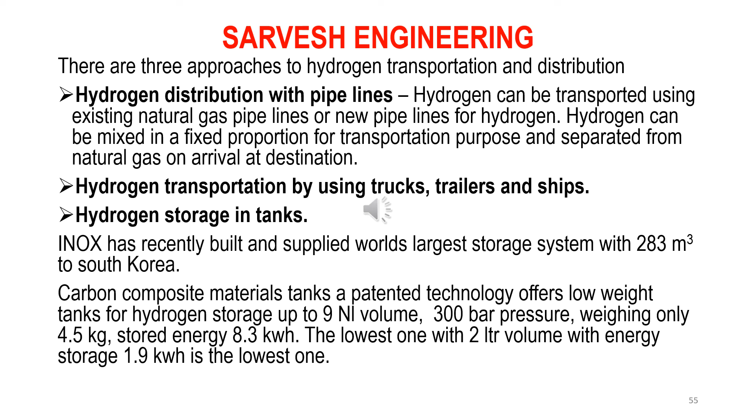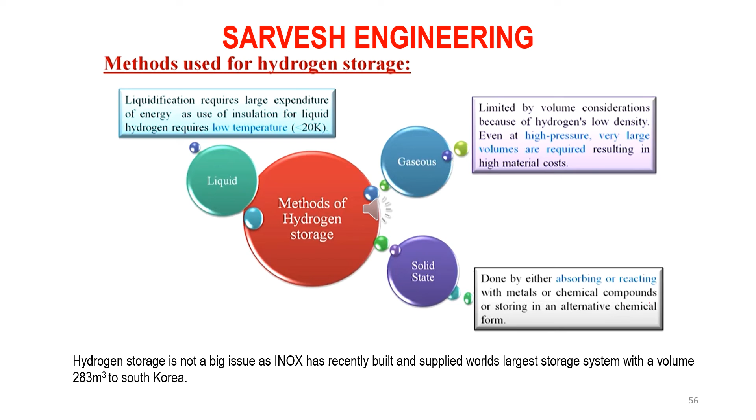And with this, we can see that the hydrogen transportation and storage is not a major challenge in the consideration. This slide is showing the method of hydrogen storage and how the hydrogen can be stored in different forms. In this slide, we have discussed the issues related with the different storage technologies.

The main issue with the compressed hydrogen storage or the gas storage is it requires very high pressure, and this pressure and the system to maintain at that pressure is a challenge. Whereas in liquid hydrogen, the hydrogen boils off at minus 253 degrees centigrade temperature. So you need to maintain a temperature much below this temperature, and it requires a lot of energy to keep the hydrogen cool so that it should not boil off, and it is a costly process.

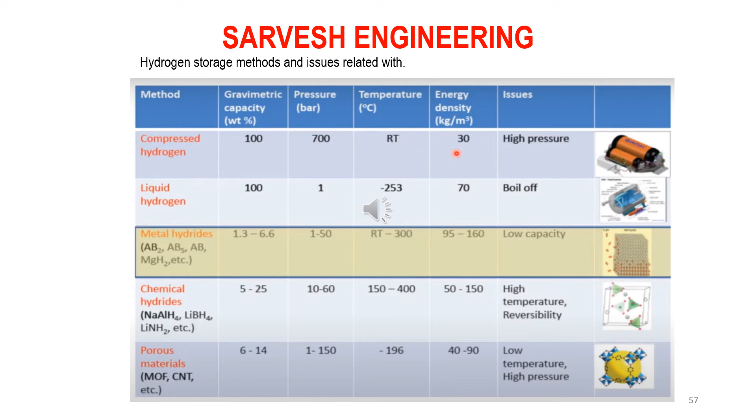Metal hydrides, although they offer very high density, the capacity of storage is comparatively low, and for extracting the hydrogen, you again need some energy to use.

Now we will discuss here the infrastructure required for hydrogen production. Hydrogen production can be done in two ways. One, by a pilot project rated at 1.8 kg per hour hydrogen generation capacity, or by having a small commercial project rated at 180 kg per hour hydrogen generation capacity. For small pilot project rated at 1.8 kg per hour, the connected power required is 100 kilowatt. The process water required is 18 liter per hour. The building is 100 square meter and open land of 400 square meter is sufficient.

Whereas for small commercial project rated at 180 kg per hour hydrogen generation capacity, connected power is 10 megawatt. Process water is 2500 liter per hour. The building is 4000 square meter and open land is 10,000 square meter. The process water can be recycled and reused. So water is not going completely to the waste system.

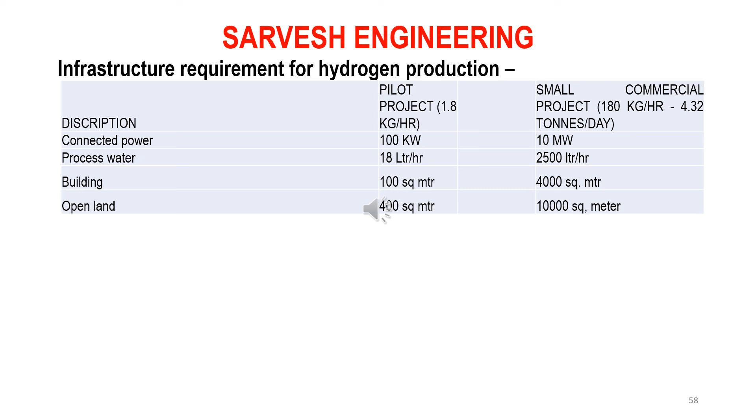After going through the infrastructure requirement, we move to the capex required for the project. Since the project is proposed on two different structures, one of them is a pilot project which we need to get for reverse engineering also, and the second one is a small commercial project. So we will discuss the requirements for both the projects here.

The pilot project rated at 1.8 kg per hour hydrogen will cost approximately 400,000 euro, and while ordering we need to pay 160,000 euro with the confirmed order, whereas the balance payment of 240,000 will be due on invoice after about 11 months, as the lead time required for fabrication is 12 months. This project will also require a solar power generation, for which it may cost approximately 5,000 US dollar.

The hydrogen generation capacity of this project will be 43.2 kg per day, and at a sales revenue of $5 per kg, it will fetch $216 revenue per day, with expected yearly sales revenue of $78,840 and expected payback of 5 years or 61 months.

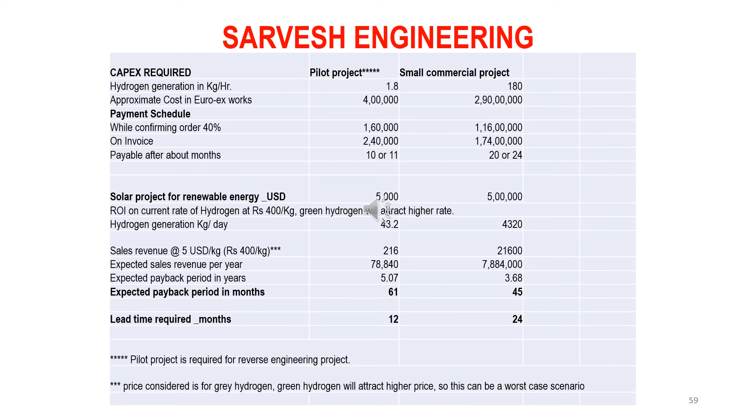After understanding green hydrogen, its manufacturing process, the entire green hydrogen economy, and the forecast of future green hydrogen requirements, we conclude that green hydrogen requirements are very high. Considering the market potential in India as well as for export of green hydrogen, and the government support extended for development of green hydrogen generation, we recommend going into the business of green hydrogen manufacturing as well as development of electrolysers with MIT World Peace University Pune, because the electrolyser business is also going to be very huge, and we should exploit this opportunity.

Now, how do we go ahead with the business? We have already identified companies who have been in this business for quite a long time, and we would recommend a joint visit of the team to various suppliers before we choose a potential partner. This visit will give us an opportunity to witness the different technologies, the setup, and the strength of the potential partner.

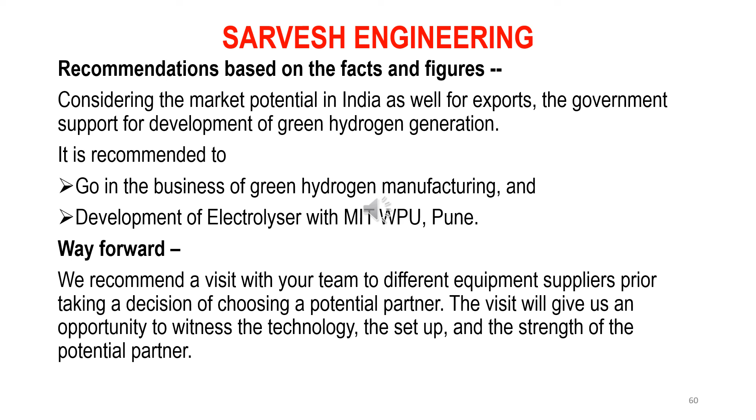Now I would like to give a brief information about myself. I am basically a mechanical engineer, backed up with post graduation in marketing and production management simultaneously, way back in the 1980s. I have wide experience of over 44 years in the industry, which includes 20 plus years of overseas experience. Although basically a mechanical engineer, I'm well familiar with mechanical systems, hydraulic systems, pneumatic systems, electrical systems, low tension power generation and distribution, etc.

I was a nominated member of the Kenya Bureau of Standards to fix the standards for plastics in Kenya. My last assignment in India was as Managing Director cum CEO of Bericap India Private Limited. Bericap is a group company of an MNC headquartered in Germany, a renowned name worldwide for plastic caps and closures. Bericap has 21 manufacturing plants worldwide with 4 in-house R&D centers and 2 in-house tool rooms to develop tooling. We have successfully implemented over 24 projects on turnkey basis in India, Kenya, Tanzania, Nigeria, South Africa, Kuwait, etc.